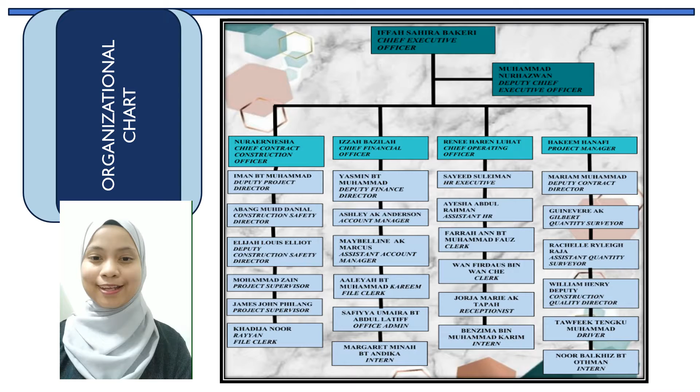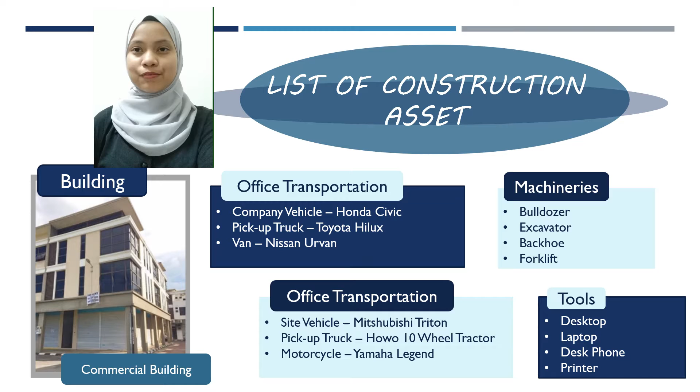This is the list of construction assets for our company. First, we have the building, a commercial building, where the clerks, staff, and managers work, equipped with tools such as desktop, laptop, deskphone, and printer. We also have our own transportation, such as company vehicles Honda Civic, Toyota Hilux, and others. We also have machineries such as bulldozer, excavator, backhoe, and forklifts.

Now we will proceed to our ongoing projects. The first one is the proposed new archive building for Pustaka Negeri Sarawak at Kuching. The second one is a sport complex at Jalan Simpang 3, and the third one is the proposed construction and completion of a guard house.

Now I will proceed with a list of completed projects. Our company has done so many projects, but I will only mention three of them. The first one is the construction of a car park at Wisma Sesko, Kuching. The second one is Clinic Dr. Wan Ali at Jalan Depot. And the third one is the proposed renovation of a single story house for staff at Batang Ai Township District.

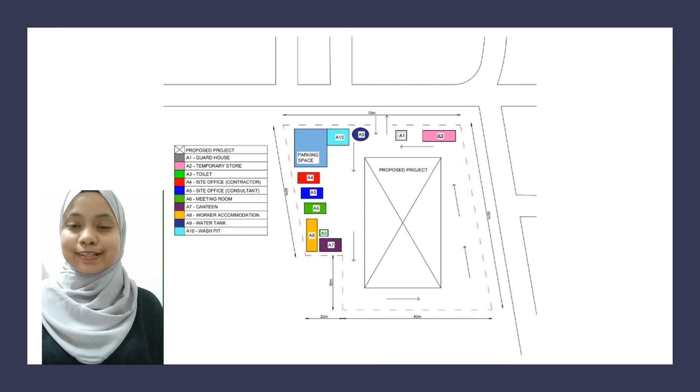In the middle of the site, we have the X symbol representing the proposed project area. Near to it, we have allocated all the temporary buildings for the use of the workers, such as guardhouse, temporary store, toilet, site office, meeting room, canteen, worker accommodation, water tank, and wash pit. We can also see an arrow, which is actually the access for all vehicles or transportation to the site.

For the material schedule, the elements involved are the item of material listed and the months. For the item listed, the materials are based on those that can be obtained from the tender document, which was done in task 2. For example, items such as tiles, piles, concrete aggregates, paint, and so on.

An example of one month that can be taken is October 2020. In this month, the work mostly done is roof work. Hence, the materials mostly used are timber struts, roof truss, UPVC gutter for the rainwater goods, screws, and more. So the only materials used in this month are those that are relevant for the specific work.

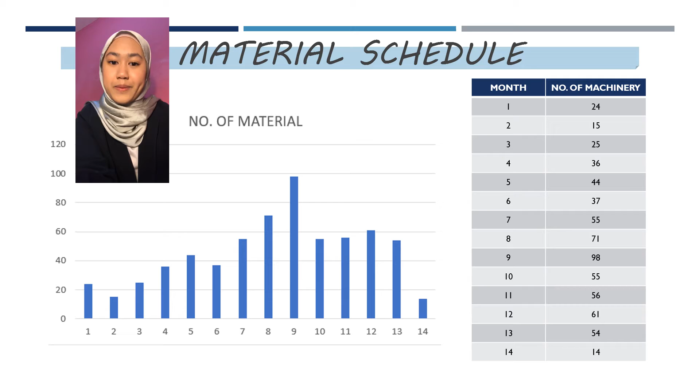Moving on to the machinery schedule. For the machinery schedule, the items listed are the machinery and plants involved in the construction project, including excavator, mobile cranes, welding set, backhoe, and so on.

For each month, the machinery used will be different. This is because it is based on the construction work done that month. For example, in May 2020, the work mostly done is excavation and delivering of items on site. Hence, the machinery used that month is mostly excavator, mobile cranes, and lorry. Same goes for other months — the machinery used depends on the work done.

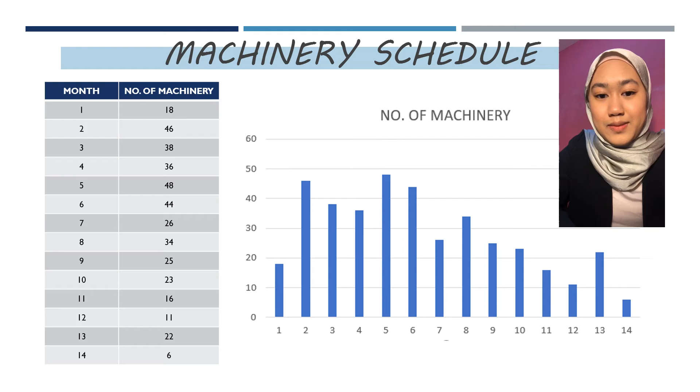Proceeding with the labor schedule. For labor schedule, it is similar to other schedules. There are two elements involved: the first is the list of items, and the second is the month of the construction period. The listed item refers to the manpower or construction team involved in this project, including the site supervisor, bar bender, general worker, and so on. These workers are scheduled based on the work done each month.

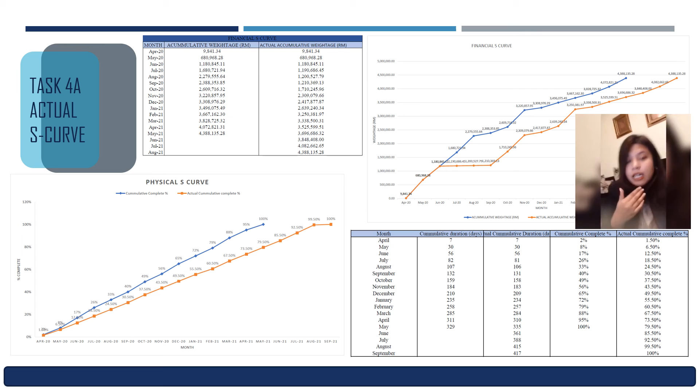I will explain about the cumulative duration and cumulative complete, because in order to create a financial and physical S curve, we have to know where the amount comes from. So the first one is cumulative duration, and the second one is cumulative complete.

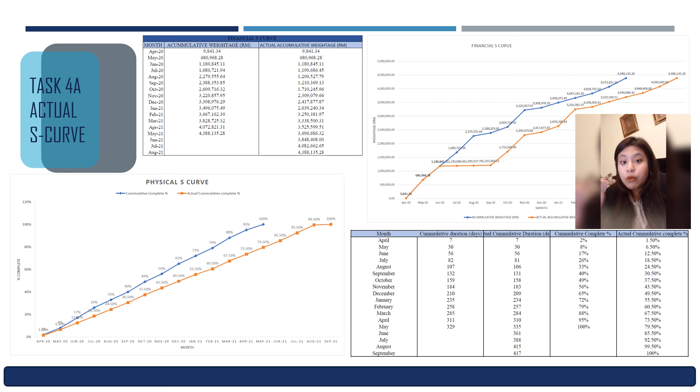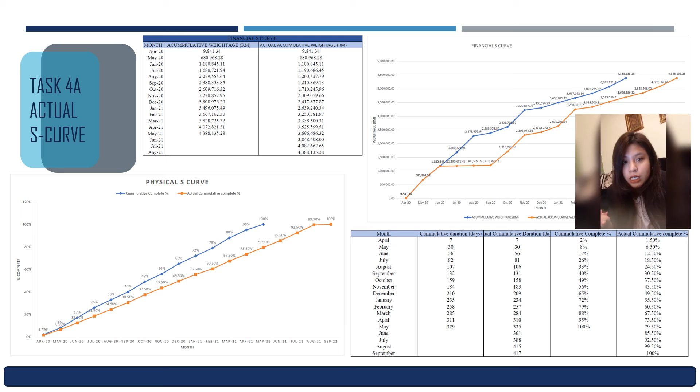I took the cumulative duration from the schedule made by Iffah, and for the cumulative complete percentage, I calculated it by dividing the cumulative duration by the whole duration and multiplying it by 100. After that, we can see the progress of our project, for example, in the month of April, how much work progressed.

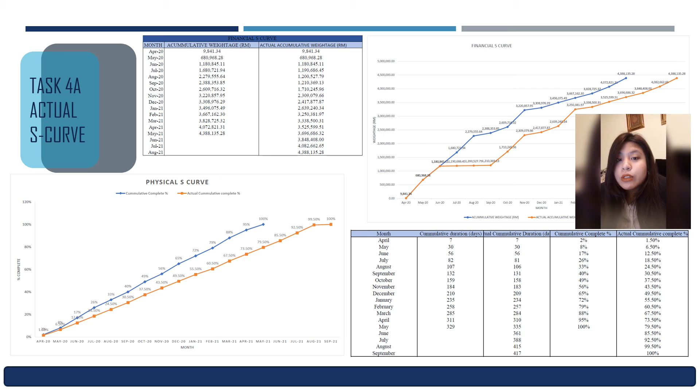Now on the slide it shows the actual physical S curve. The physical S curve is different from the financial curve, because the financial curve shows the amount of the tender, but the physical curve shows the progress of the project. I will explain one by one.

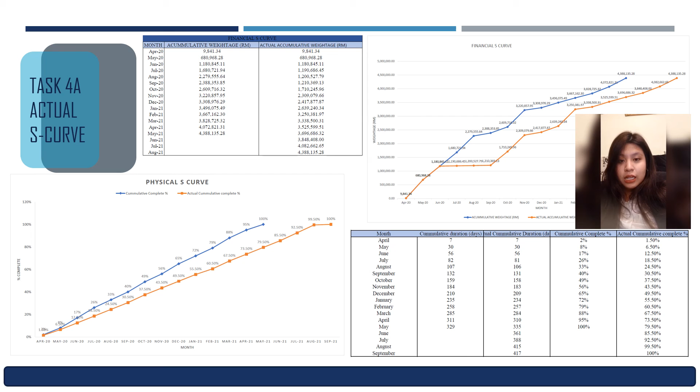As you can see on this slide, our company managed to run this project smoothly, if not for COVID-19. Our physical S curve still looks good because there is no decline, it's always going up for this physical curve. So I guess it is okay now.

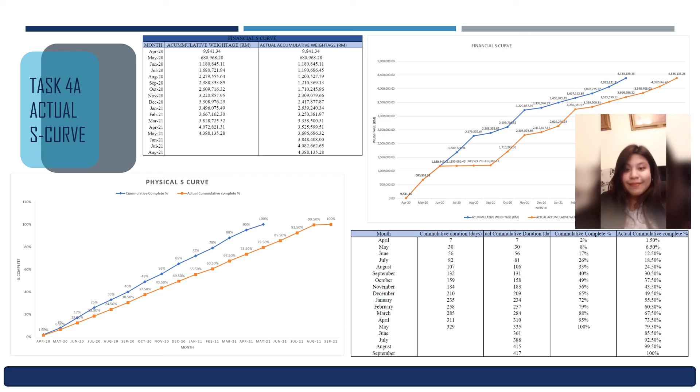Moving on to the safety and health activity report. This report is done based on the activities that were held or conducted at the site during the construction period of the project.

Based on the report done by our company, examples of activities held during the construction period are toolbox meetings, construction netting, fogging, and inspection.

For toolbox meetings, they are held to brief the workers on the regulations, the dangers, and the precautions that workers must comply with. Meanwhile, construction netting is a net or safety precaution installed throughout the site to minimize the danger that could happen at the site.

For fogging, it is done to keep the site clean and to avoid cases of dengue and so on. Lastly, inspection is done to make sure the site is in good condition, so the risk can be minimized, and so on.

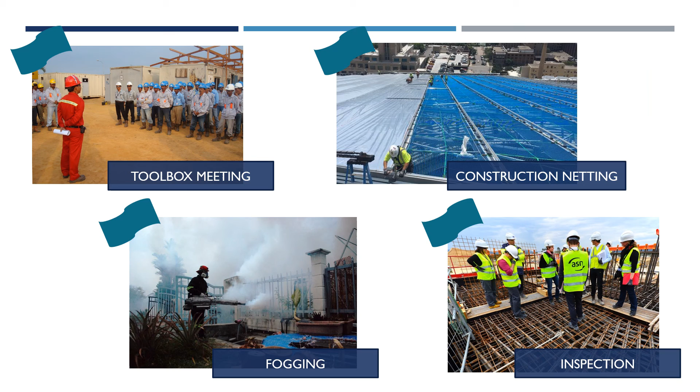Moving on to the site safety implementation plan. This plan exists to make sure that workers or any visitor who wishes to enter the site complies with the safety rules needed whenever they are at a construction site, in order to avoid any hazards or injury that could happen.

This plan includes installing safety signs, such as PPE signs and warning signs, and preparing or placing safety tools such as safety kits and fire extinguishers throughout the site. With these measures, risk can be minimized, and if any hazard occurs, immediate remedies could be taken using the safety tools already prepared at the site.